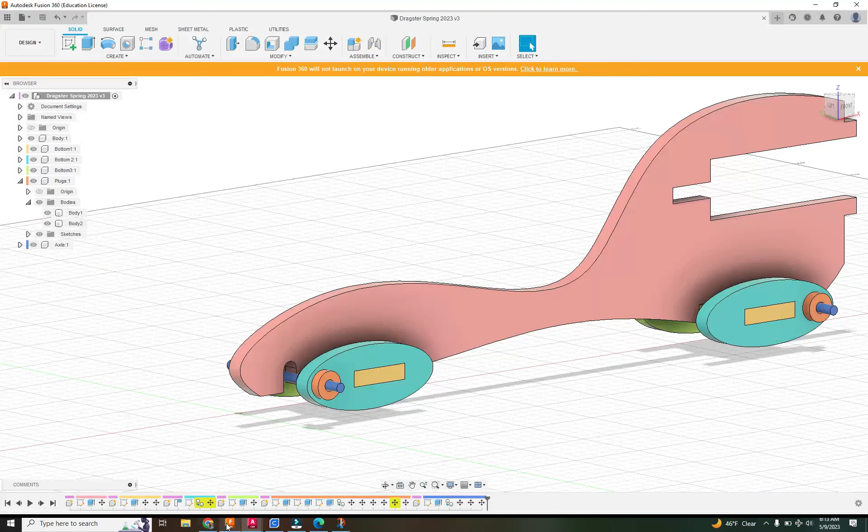Now we're going to create this little adapter piece up top here and also this back circle piece. If you take a look at my Fusion drawing, this piece here is sliding into here, so we want to make sure that notch is at least this distance going in. We want to make sure the edges line up right here, and it's going to be the same width that we see right here.

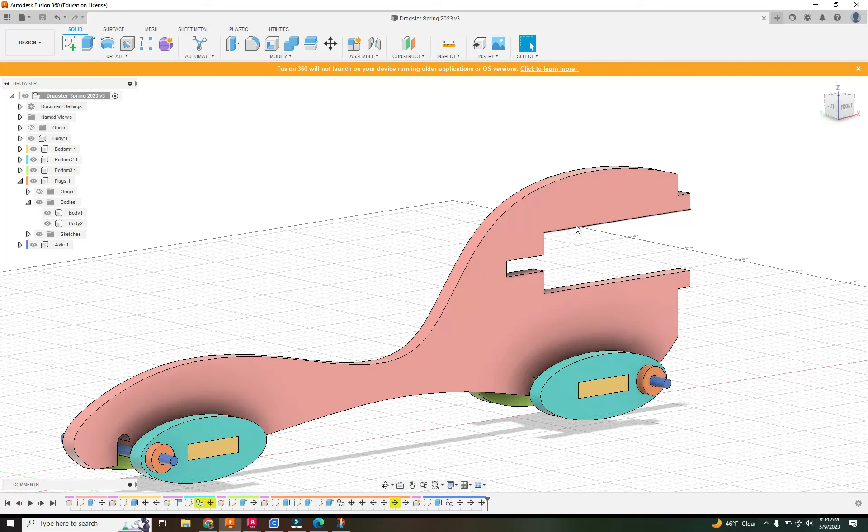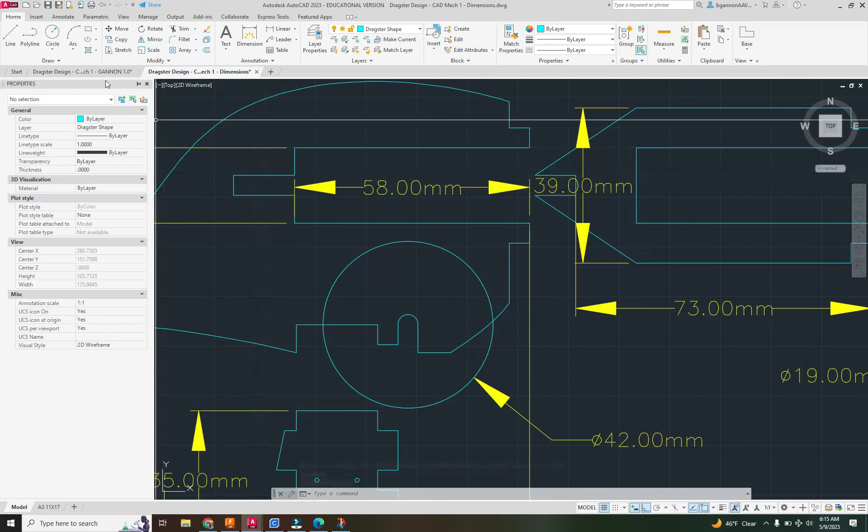Coming on over here, I might make this a little bit different than what you saw in that drawing. I'm going to draw out some hidden lines. I'm actually going to move this whole drawing over a little bit because I need a little bit more space. Let's get up right up to the edge there. There we go, okay, so hidden lines.

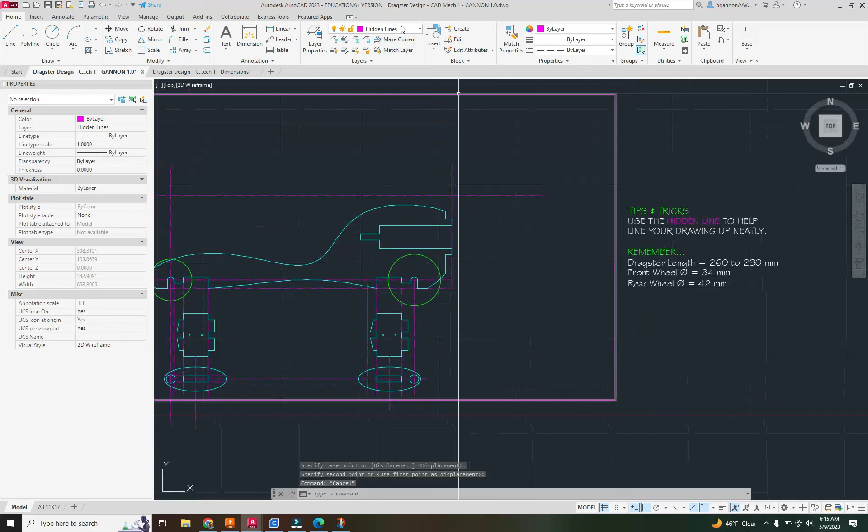I'm going to draw some lines out. I want to represent - definitely want to get the center point here. I need to turn on my midpoint. I'm going to draw this pretty far out too, and then let's do a line from there, a line from here, a line from here, and let's do a line from these edges too, coming out. So I can draw everything out there.

Okay, so now let's take a look at what we got here, where I want to start. I'm probably going to start with drawing this shape out right here. The length of this, I believe I made the same as this area here, so it's 58 for length, and a height of 19.

So back over here, I'm simply going to draw a line, on my regular line here. Do it right here, coming across. I can trim this out in a second. So TR for trim, boom, boom, L for line, and I'm going to draw this to 58. Same thing over here, 58.

Like that, going across. Okay, then I'll take a look at over here what we got. So I just drew this out here. Now I want to offset this line by 15. Then I'm going to make this distance here on this one - I think I have a length of 10. Yes, a length of 10 there.

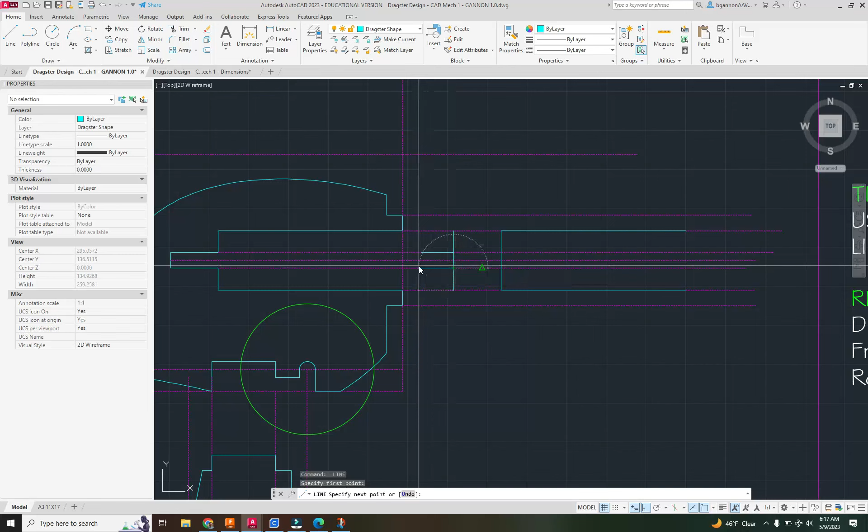And then we take a look back at our drawing here. Just drew this out. Now I'm going to come out to this outside, and I'm going to extend this line up here, like so. So I'll extend this line, then I can trim it out in a second. You can also type in EXT for - no, I don't extrude it, extend. There we go.

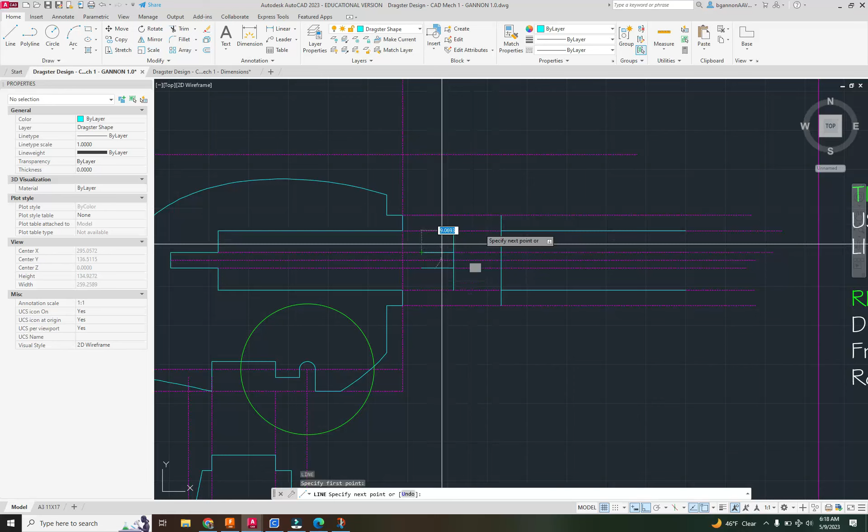Trim this top line here. Then I'm going to draw a line coming out to here, a little angle. I can trim that other line out in a second. TR for trim, get rid of that, get rid of this, get rid of that.

Then I'm going to draw this line out too. I'm just going to draw it nice and long for now, get rid of that in a second. I'm going to trim this out. Don't need that, don't need this here. And then it needs the notch in, so I want the same type of notches here that you see on this drawing. So I'm going to come in 5 and out 5 and up 5.

So I want to make sure - I'm actually going to offset from this back line, offset it in 5. That'll make it easier. So I'm going to draw a big line here on the back, and we'll extend this up, and then I'm going to offset this in 5, like so. Whoop, went the wrong way. Oh, it really wants to lock on the inside there. There we go.

All right, trim some of the stuff out here that I don't want. Don't need that. And then if we look at our drawing here, I want to leave the inside together and the outside can go away. So TR for trim, get rid of this.

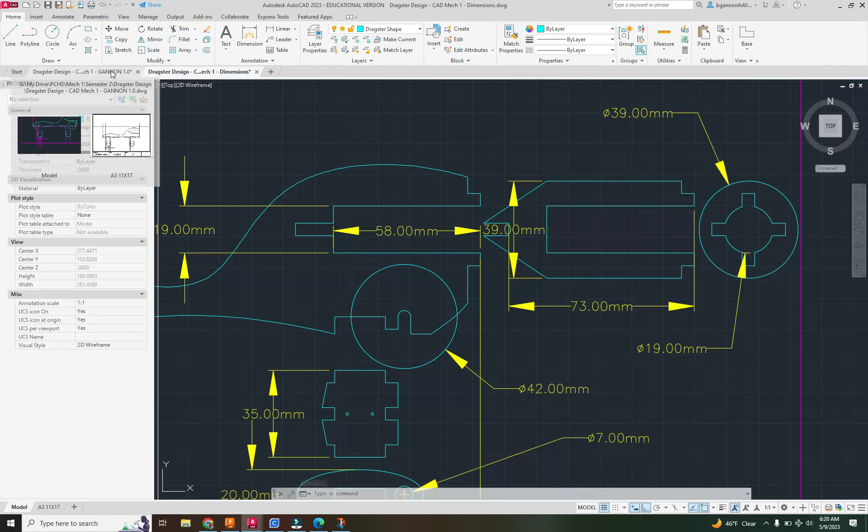Oh, I forgot one piece, didn't I? I gotta offset that by 5 more. Okay, sorry everyone, offset by 5 more, going out, going out. I'm gonna extend these lines. I think I forgot something there. I'm gonna bring this line actually out to here, boom, bring this line out to here, boom, like so. I think I can get rid of this line for right now. Delete that, delete that.

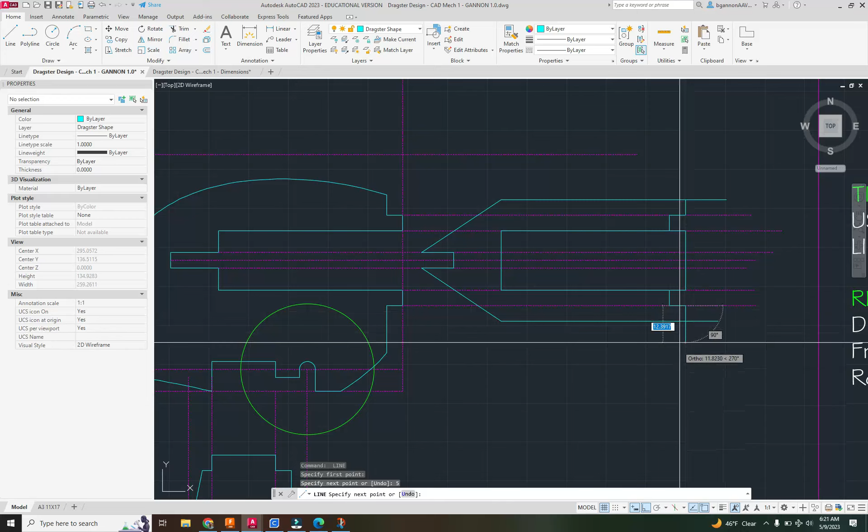Then let's just draw this out from that corner, 5 up, 5, like that. Should be good. And then same thing here, 5 down, 5 up like this. And then trim this out.

Let's just double check this. I think this is correct, except that I might need to put those on the inside. Oop, yep, did it wrong.

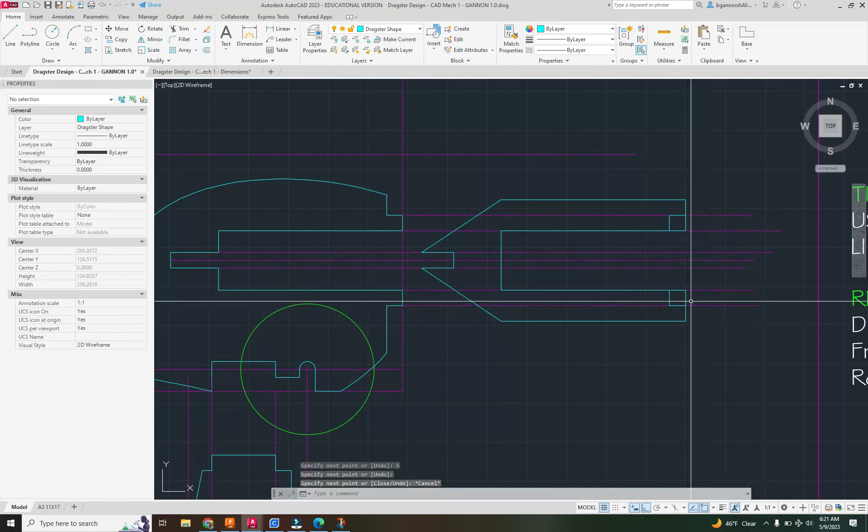Okay, so I'm going to draw a line coming out here, 5, 5, and then 5 right there. And I want to get rid of this outside, this piece here. Boom, boom, and boom, something like that. L for line, sorry, and 5.

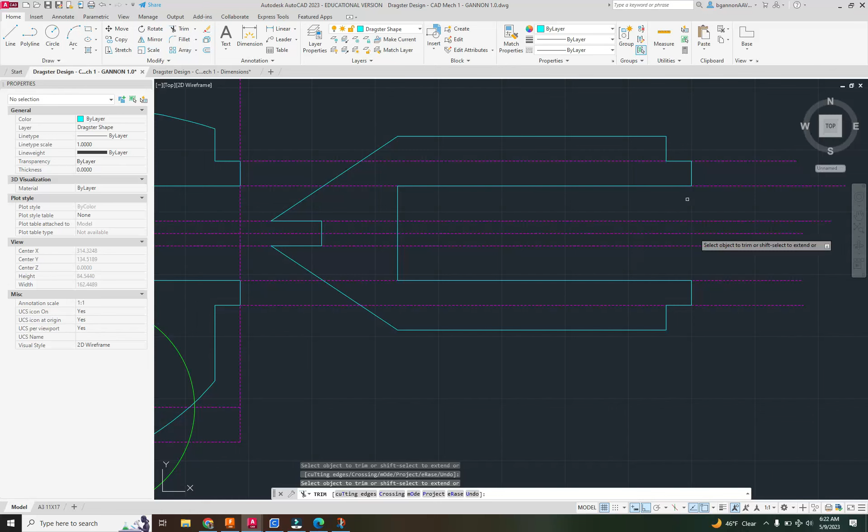And there's 1,000 ways you can do this too. This does not need to be done the way I am going about it right here. Don't want that, don't want that. And there we go, cool, that looks about right, and that should slide right into that notch right there.

And then the last video is going to go over how to create this little circle here, and that's pretty simple with your hidden lines. All right everyone, that's the end of the video right now.